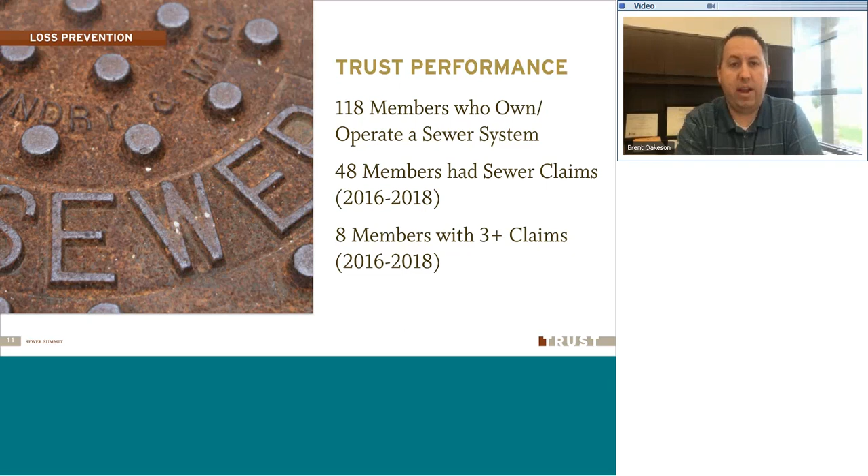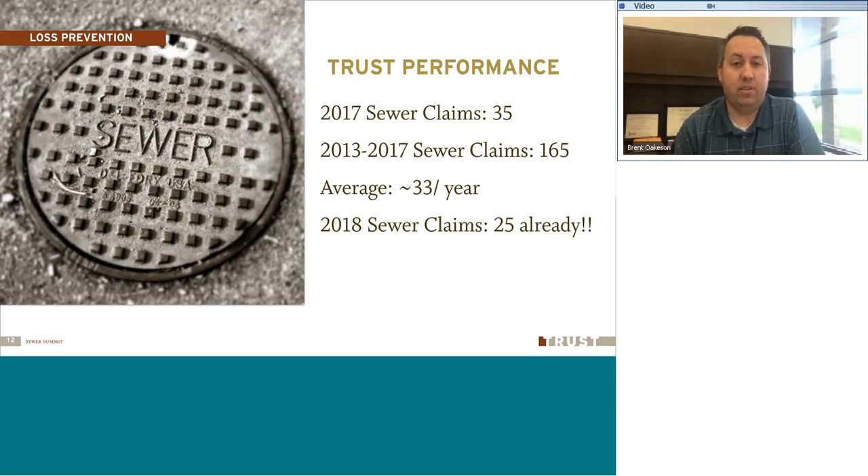However, this year we're a little ahead of schedule—about 25 claims have already come in through this part of the year. Granted, we're into August and there are still months left, so there will likely be more. But hopefully we can lessen that. Having 25 by mid to late summer is a bit ahead, a little higher count of sewer claims so far this year. Just an update for you on that.

One example: a lift station failure caused 2 houses to back up, causing approximately $70,000 damage in one home and $40,000 in another. Then we had another claim where the homeowner wasn't home at the time—the main line backed up into a home with nobody there, causing about $40,000 of damage. So there have been some really costly claims this year.

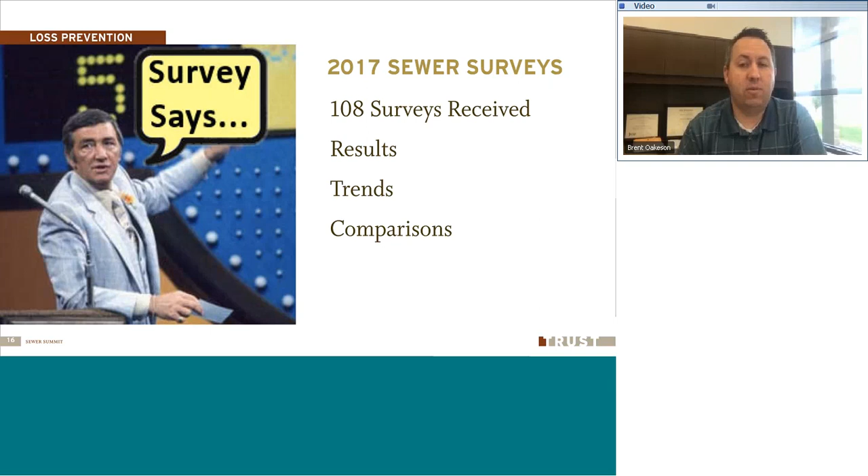I'd like to share those results with you and show you what's happened throughout the last year. We can also use this for comparisons to help you see how you stand against the average of the trust, how your system is being managed, and the frequency of the things you're doing. So I'm going to show you those real quick. This is one of the surveys we sent out in previous years.

We'll be sending this out again later this year toward the end of the year, and we'd like to get all those surveys back by the end of December, the end of the year would be best. Then we can use that information to gather this data, do comparisons with claims, and share that information with you again each year. We find this to be very valuable to give a good overview of what's going on in the state with the membership we have here at the Trust.

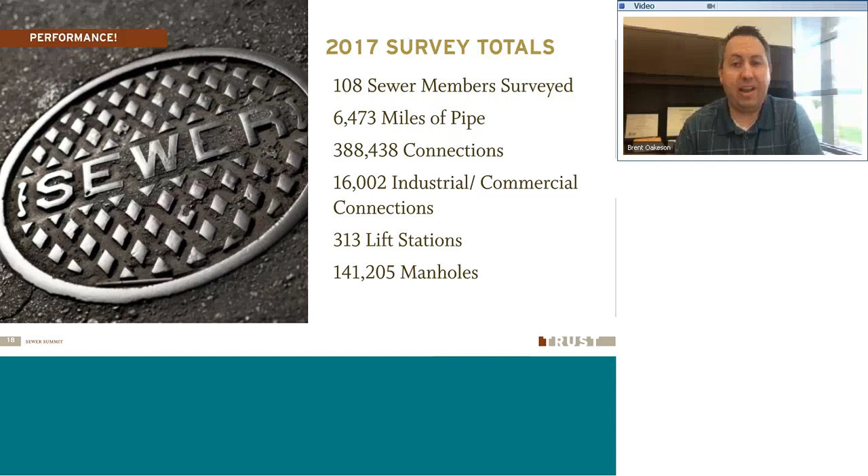So be watching for that sewer survey, I'll send that out to you later this year. But looking back over 2017, of all the 108 surveys we received, you can see our amount of miles of pipe: 6,473 miles of pipe in the state from these surveyed members here at the Trust. Over 388,000 connections, over 16,000 industrial or commercial connections, 313 lift stations, and over 141,000 manholes. Obviously that's a lot of exposure, things that can go wrong and cause claims and damage. So we want to look at each one and see what we found. From those surveys, about 70% of the manholes had been inspected.

About 99,000 manholes were inspected last year, according to the survey. Of the 108 members that turned in that survey, 50 had done 100% manhole inspection on their system, meaning they had gone through every manhole, at least popped a lid and taken a look to check the condition and make sure things are flowing okay. That's a really good best practice. It's probably the number one key thing we focus on with our Trust Accountability Program, getting in there and seeing with your own eyes what's going on in each manhole. It really makes a difference to prevent backups and problems in your systems.

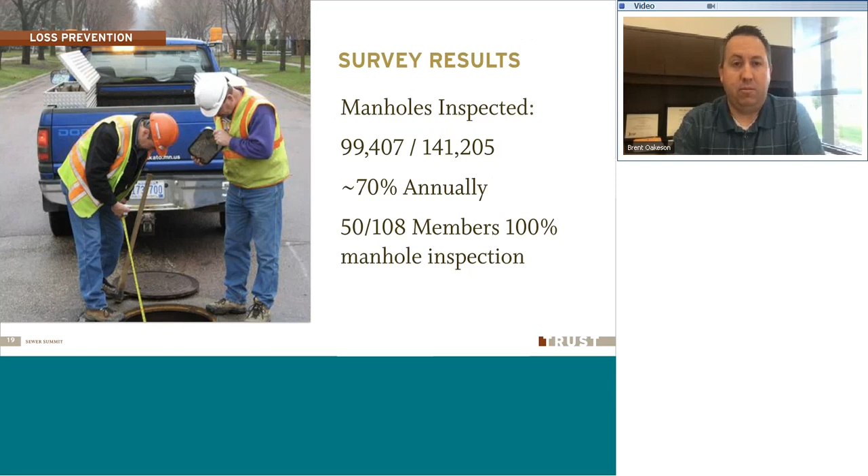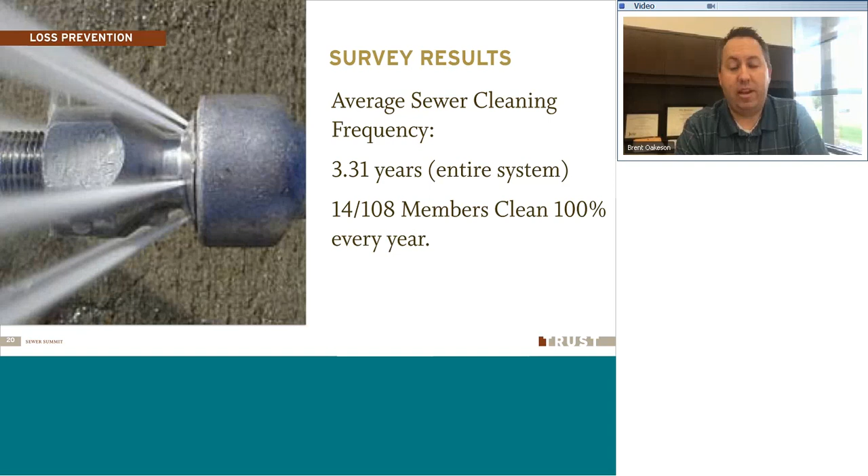So some really good numbers there. We also look at the average sewer cleaning frequency. We like to know how often your entire system is getting cleaned, the type of rotation you have. On average, the Trust as a whole came in at 3.31 years as the average time to do the entire system. We had 14 members that actually do 100% of their system every year, and they're likely not having backups because of that increased frequency of inspection and cleaning. So good information there too.

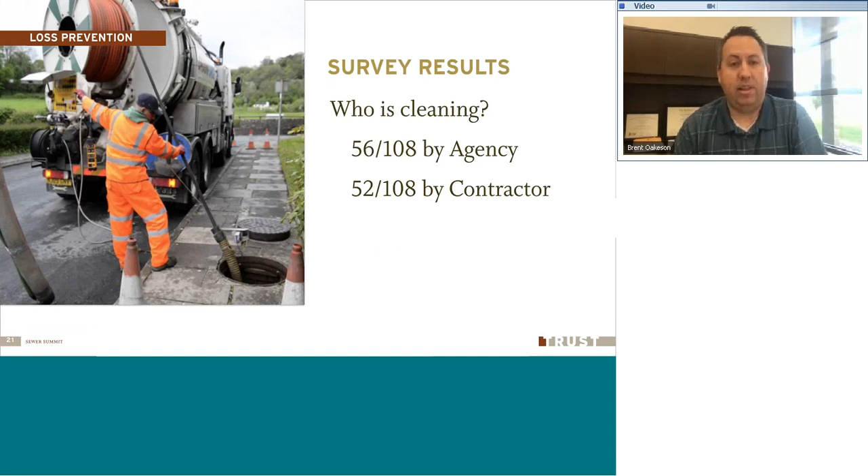Who is doing the cleanings? We had about 50-50 on this, same as last year. Usually about 50% is the agency itself doing the cleanings - they have the equipment to do that. The other 50% or so have contractors come in and do it for them. Just an idea for you there.

Looking at backups, agencies that have equipment to respond to backups are likely to have a quicker response time. They're likely to be able to take care of it themselves. About 78% of the Trust membership, according to this survey, has their own equipment to respond to backups, which is great - about 85 out of 108.

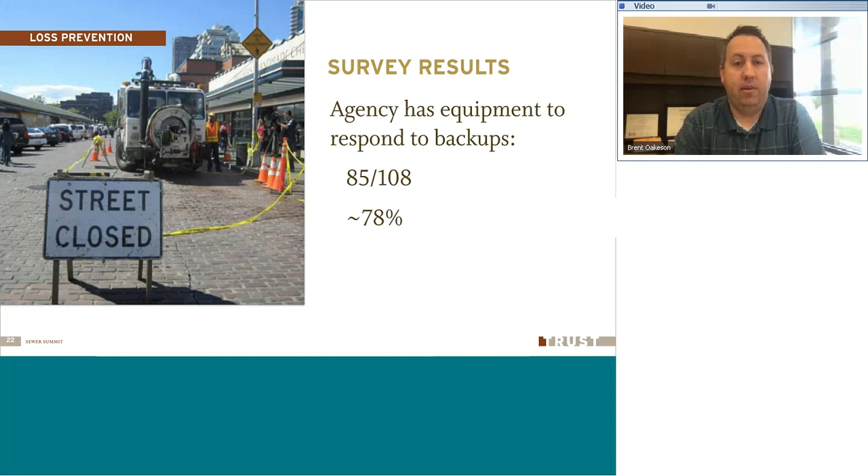As far as the sanitary sewer management program, the agencies that have adopted these - 87 of 108 have actually adopted one. They've turned in their NOIs, their notice of intent, and permitting and all of that is being done. So we're at about 80% reported from our survey with the Trust. Last year was at 71%, so we've had an increase. The more entities that do this, the more likely they are to have a better, more comprehensive program that prevents the backups.

Back in 2014, it was only 34%. So you can see those numbers have gone up a lot, especially in the last couple of years, and that's a really good positive thing to have for managing your system.

So we send out report cards. We've done this in previous years. We use the information you send in from the surveys each year to compile the totals, look at the numbers, and then send you a report that shows how you stack up against the averages at the Trust. Here's an example of one we've sent out in previous years, and we'll continue to do this. I'll be sending these out to those of you on the webinar watching this. We'll send you a copy of your report card showing the specific data you put in your survey - miles of pipe, connections, cleaning frequency and things like that - so you can see how you stack up against the averages. That's a good indicator for you to see how your management is going, and maybe there are some areas that stand out that you can improve on or do a little more with next year.

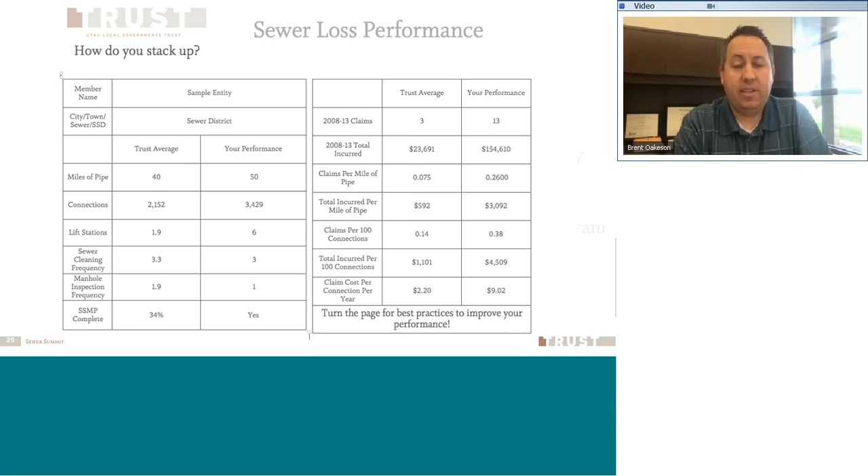So now I'd like to turn some time over to Jennifer Robinson, with the Utah Division of Water Quality. She's going to talk to us today about the Utah Sewer Management Program. She's been a great help for us in the past, and she has some great information about new updates going on. So with that, I'll turn it over to you, Jennifer. Thank you.

So I will be speaking on the Utah Sewer Management Program. This is the program that was put in place a few years ago by the Division of Water Quality.

So I'm just, ooh, this isn't working. Why is this not working? Oh, there we go. All right.

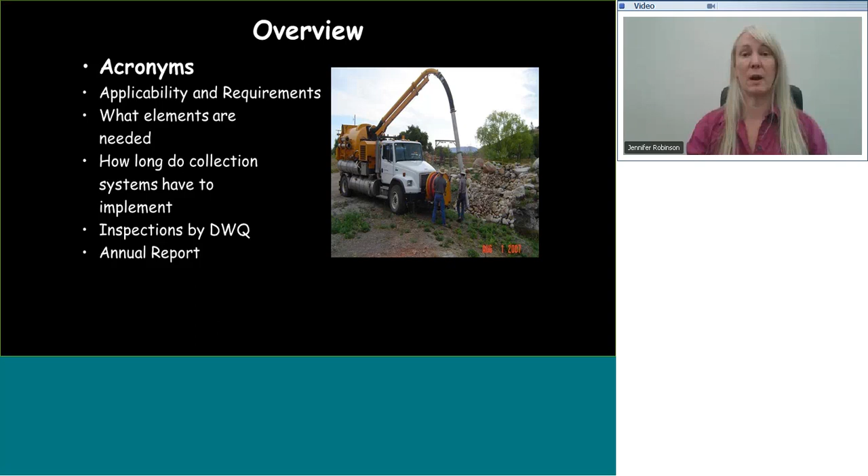Just an overview of my presentation, we're going to go over these elements of the program. This is a shortened version. I will be giving a presentation at Rural Water as well as at their Northern Conference in Layton that will be a little bit longer, with similar information but more detail, as well as for operators down in the Richfield area. I will also be giving one for Rural Water.

The SECAP, that's the System Evaluation and Capacity Assurance Plan. That is the plan that if you have, I believe it's over 2,000 connections, you need to implement. If you're less than that, it's an option for you.

The Sewer Overflow Response Plan is something that everyone has to implement, as well as the SSMP, which is the Sewer System Management Plan. So just some acronyms so that you're aware as I go through this, of what I'm speaking about.

POTW is the Publicly Owned Treatment Works. That basically extends from the wastewater treatment plant into the collection system, so it covers everything. So we'll go over applicability.

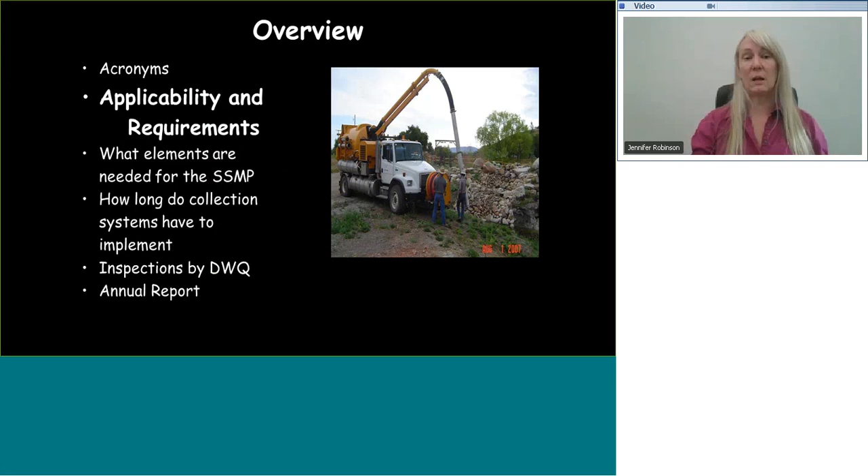The applicability of this rule is basically everyone that owns and operates a sewer system in the state of Utah that is public, federal, state, or municipality is covered by this. The only thing that would not be covered under this is like a residential community that may have ownership of their collection system.

We do have a couple of those that are homeowners associations that are not covered under this at this point. In the future, we have the flexibility if it's needed to cover them.

So just some general information. It is a general permit requirement, and everybody is covered by this. A lot of times with satellite systems, you have coverage over your larger wastewater treatment plant that holds the UPDES permit, the Utah Pollutant Discharge Elimination System permit. With this one, everyone that has a sewer collection system is required to get this permit.

In order to do that, you need to complete a notice of intent for coverage. If your community has not done that yet, go ahead and get that in as quickly as possible. That link below will get you to the information regarding the notice of intent.

The notice of intent has changed slightly. It's a little bit less information than the original notice of intent that was submitted about 6 years ago, so hopefully it's simplified to the point that you can gather that information pretty easily. If you do have questions, my contact information is at the end, and you can give me a call or Jeff Studenka as well.

Next we'll go over the elements of the SSMP, the sewer system management plan you need to develop for your collection system. These are just the general elements of that plan, and I'll go into more detail regarding those elements.

First, we want an organization information chart, or however you want to put this together. This is basically who's involved in your sewer system. It can go from detail to simplicity, however you want to do it. If you just want your DRC and your operators on there, that's fine, but we do want to know who is involved in your sewer system, so there is some type of organization structure that others can be aware of.

Other things that need to be involved in the SSMP is your legal authority. We want to make sure you have the authority to prohibit things from occurring in your system, as well as making sure it's properly designed and limiting obstructions. If you have industrial users in your area, we want you to be able to inspect them as necessary, and have the ability to take actions to prohibit things from going into the system, including enforcement if necessary, to ensure your system is properly cared for by those using it.

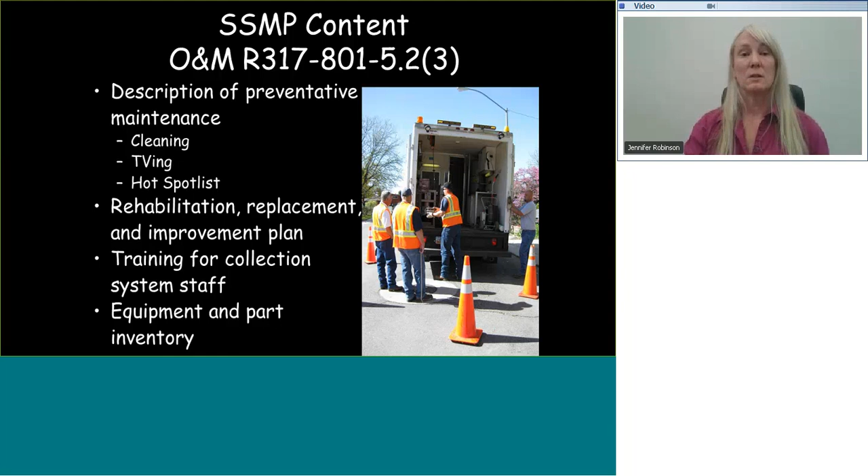The other thing is the U-Warn system, where you can call on other communities. That can also be part of your SSMP, where you have someone in the area who's willing to assist you, and that's part of being able to have that equipment and part inventory as needed. So this is really you figuring out how you want to implement these elements of your SSMP, making sure that you have adequate inspecting, cleaning staff, and also resources available to you.

The other thing is, a lot of times with these programs, if you don't document it, it didn't happen. So we want to make sure there is documentation. That's one reason we have the SSMP available to everybody on the website at utah.gov, and you can find that on the water quality page. There is a model program available to you there for the SSMP.

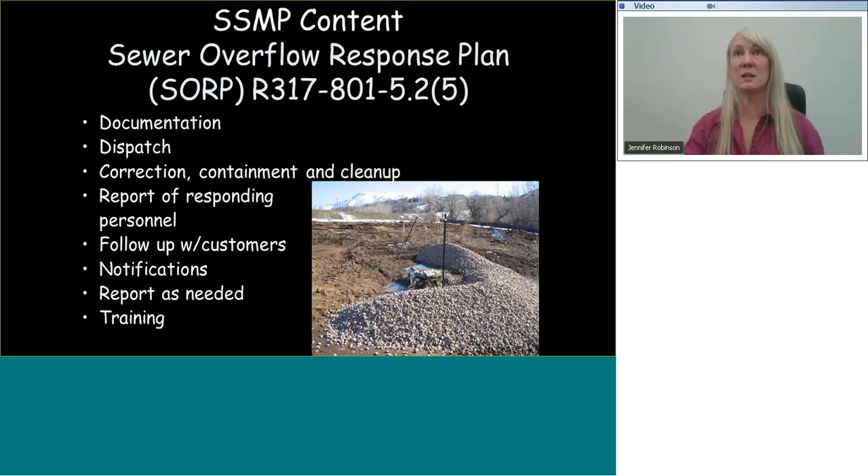The FOG control program, this is another element that if you have over 2,000 connections, you're required to have it in place. If it's under 2,000 connections, it's up to you to decide if it's needed. Now, if you do have issues with fats, oils, and greases, I would suggest you implement it, and if it becomes an issue, the Division of Water Quality may require you to implement this program. But this is really making sure that any industrial user in your service area is not causing problems in your system or causing blockages. And if there is an issue, you have that on your hotspot list and you're maintaining it until maybe a grease trap or interceptor is put in place by that industrial user.

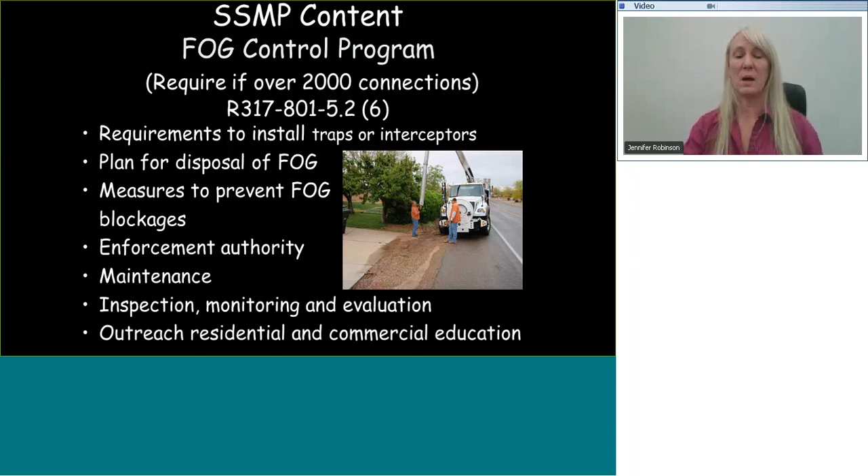As well as doing outreach to your residential community, letting them be aware of potential things that should not be going into your sewer. We've got a flyer that can be given out where you put your information on it, but it goes into the do's and don'ts of what to put in the sewer for a homeowner, and that can easily be put into a tri-fold and mailed out to your community.

So the system evaluation and capacity, the SECAP portion of this, again, it's for those facilities that are larger, over 2,000 connections.

This is just making sure that you have the capacity available in your community to handle the flow, and then also looking at trends of any increases, and how new subdivisions or new industrial users may impact your sewer system. This could also apply if you have a master plan for your sewer system—you don't need to revamp something, you can use existing resources you already have in place, just making sure that if you do have a master plan, it meets that requirement.

Monitoring, measurements and modifications. Anytime you make a change to your sewer system management plan or your SECAP, that needs to be submitted to the Division of Water Quality. You need to identify and illustrate SSO trends, as well as do internal audits of this program. This isn't something you develop and put on the shelf—we want to make sure you're auditing it, making sure it's working, and updating it as necessary. This can be developed by staff at communities; it does not need to be developed by an engineering firm. There are documents online that are available—you just have to update them with the information you want to follow.

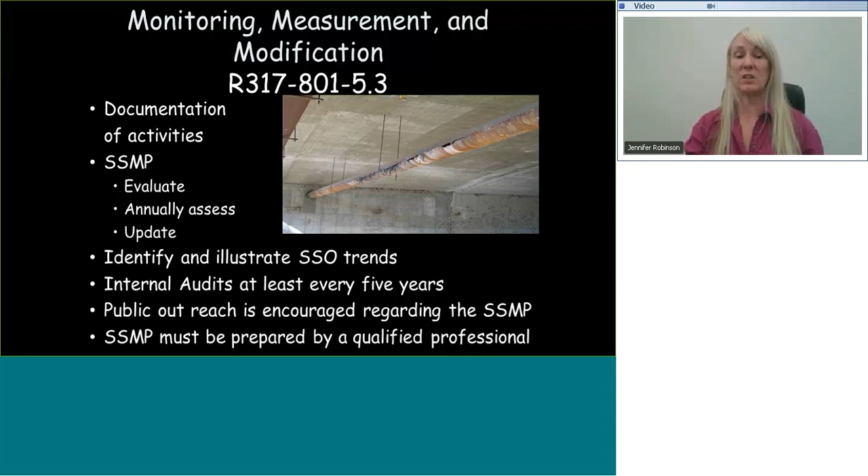Now we'll look at a couple other things. How long do you have to implement this? The rule has been in place since 2012, and you can see those dates on your screen—essentially all of those dates have passed. So everything regarding the SSMP and SECAP should have already been submitted. Hopefully those have been done.

We did decide, with the renewal of the permit, to give some people who may not have been aware of this program, or where there was staff turnover and communication wasn't there, an extension of those requirements. So anyone who has not gotten that information to us has until November 30th, 2019, to submit the SSMP and SECAP information to the Division of Water Quality.

As far as submitting those reports, we do not want your sewer system management plan or SECAP submitted to us directly. Sometimes if you have a master plan, that's already being submitted to our engineering folks at the Division of Water Quality, but what we want is basically the approval by your governing body—this should be taken before your city council or district board, with them approving implementation of the program.

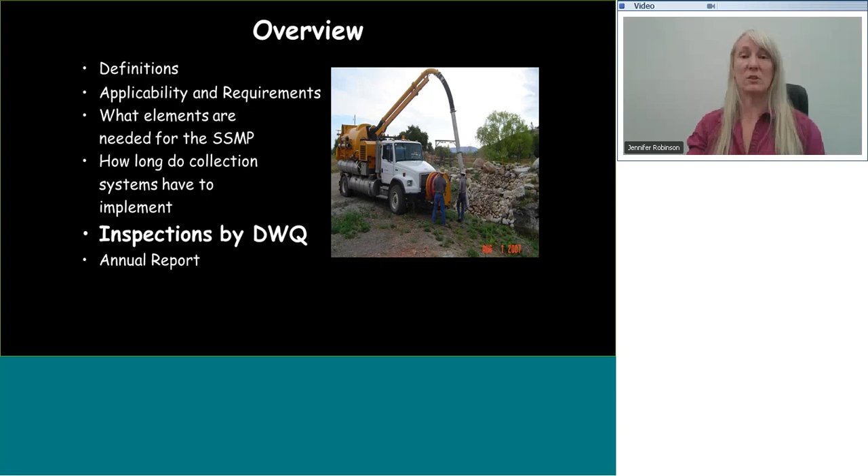Annual reports. The annual report is the Municipal Wastewater Planning Program, sent out yearly by the engineering section at the Division of Water Quality. It has several different sections, one of which is the collection system section, required to be completed every year and submitted by April 15th. This year, for the first time, we required it to be submitted electronically, and hopefully that worked out well for everybody. I believe next year we'll be doing the same.

As far as contact information, if you have any questions regarding your SSMP, or submitting documentation regarding the SSMP, SECAP, or even the Municipal Wastewater Planning Program annual report, there's my contact information, as well as Jeff Stadenka, who's involved in this program with the Division of Water Quality as well. And if you have an after-hours event that you need to get a hold of us regarding, the DEQ emergency number is there, and that's being manned 24 hours a day. So if you do have something after hours, you can get a hold of us that way. Thank you.

And again, you can always reach out to her with questions if you need help getting that in place, as she mentioned. So I want to take a quick look at some of the backup things that we see, kind of some trends, and then an overview of things we can do to help prevent the problems in the system, such as backups and overflows and things like that.

But here's some things that we've seen in the past. Foreign objects that get into the system - this has happened before. I've heard of cases where you'll have a contractor on site doing some work, maybe in a home building area. They knock the lid off and gravel falls into the system. You can get some foreign things falling in. There's even been debris get in there. Even a 2x4 has been found in a system before, down in the pipes and in the connections there. Things from the homeowners get in there too - grease, things that get trapped in there. You get a buildup of grease and roots and things that get blocking the system. Those are some of the main causes of backups.

Lift station failure, I mentioned one of those earlier. We had this year, there was a failure on one of the systems and it backed up into 2 different houses, causing some severe damage in those houses, costly claims on those. So there's lots of things that can get in there.

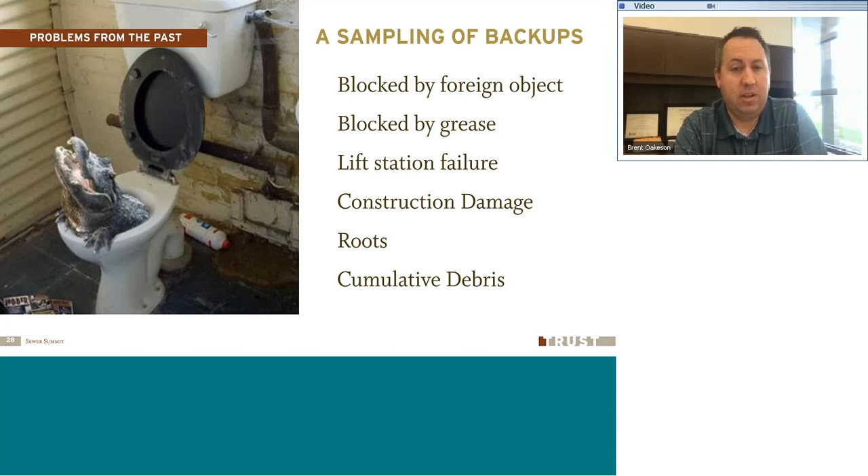There's been some cases where the connections come loose. They weren't installed properly - maybe there's laterals that weren't connected properly to the main line, or over time things shift or break or come apart.

That often leads to problems as well. Lack of inspections is another root cause.

There was one earlier this year where we had a backup into a home, a claim on it, where there was a lot of damage. Talking to the member of the trustee entity, they went back looking at the mapping, looking at when was the last time this place was inspected, and they found that it had been missed. It was a section in their system that for some reason had been overlooked or hadn't been looked at for a little while, and possibly that's the reason that caused the backup. They weren't able to check it and find obstructions or things in time before it ended up causing the claim and the backup. So inspections are critical, looking in your system and knowing those things.

Roots and grease, we talked about that, and we'll talk more on that as well. And actions by the public—as mentioned, homeowners can put things down. They may not realize there are things that can cause real problems in the system, whether it's kids' toys, debris, or other things getting put down there. We often find that that's a root cause as well, so there are things we can do to manage and look at that.

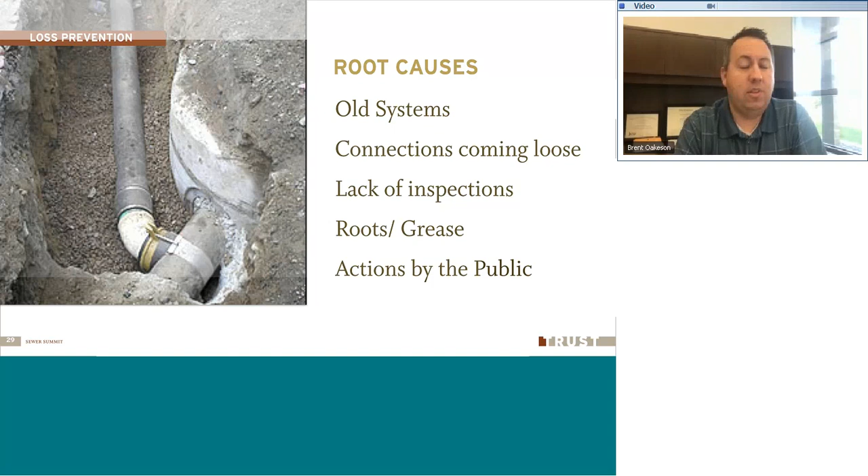So that's one thing you want to do in managing your sewer system: make sure you're finding those real roots. Find the root cause of what's causing it. Ask yourself why—why are we having backups, why are these things happening? There might be some hot spots where you need regular maintenance to make sure problems aren't happening in these locations.

So make a plan. Have corrective actions—maybe hitting those hot spots frequently throughout the year, checking on those more often. Maybe there are things that have happened in the past in your system that you want to go back and readdress on a regular basis. But have a plan and look at that so you can prevent those problems and have a better running system.

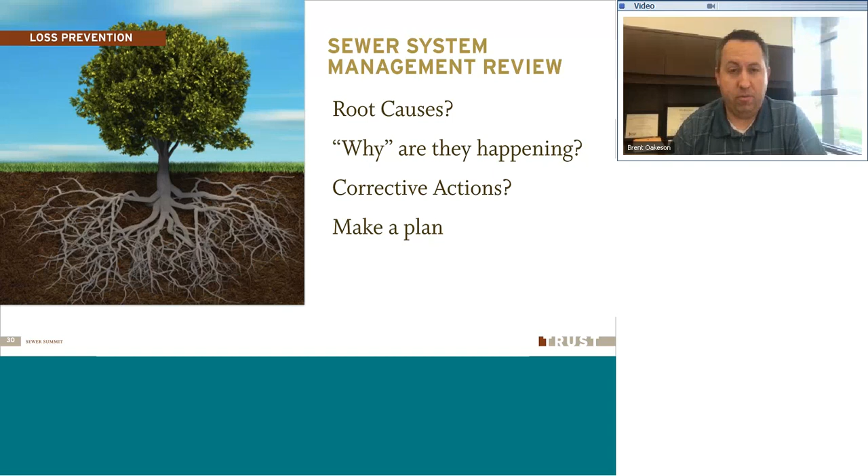So some of the other things you want to look at, and we look at this in our sewer survey because we see these as critical: are your manholes being inspected annually? This is the number one thing we see that could be the greatest contributor to having a successful system without backups and claims and problems. See the frequency of your inspections, and see if there's any room for improvement there that you can increase those inspections a little more and make sure you're getting them all in each year.

As well as your sewer cleaning frequency—that should be on a regular basis, and it may vary a little from entity to entity, but have a good frequency that meets the needs of your system, so you can get in there and have a comprehensive look at it, getting it inspected and cleaned. We find that to be a really good thing.

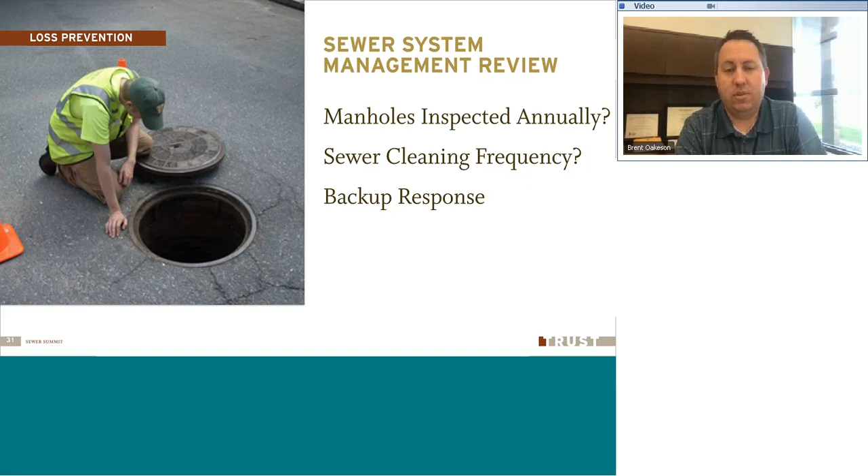Take a look at your backup response. See how long it takes to get to a backup, what equipment you have available, and how your plan is. Maybe there are improvements you can make to increase that response time, have a quicker response, and get on things before they become a worse situation.

So these are other things you want to look at with your sewer system. Jennifer talked about the SSMP—make sure that's complete and in, that will be a real key to helping you there. Make sure your operators are trained; get them the training, certification, and things they need so they can effectively and efficiently manage that system.

Look at your capacities, make sure your inspections are up to date, and—Jennifer mentioned this one as well—a map of your system, make sure it's up to date. That can really help you know where things are and what's going on in your system. For example, you could have lines you don't get to check as often, or manholes that are covered up.

Maybe they're out in the field and you don't know the exact location of them, or there's things that are getting missed for some reason, or you're not able to have a look at throughout each year. But having a map of the system that's up to date, that shows where all those lines and manholes are, all the access points and things like that.

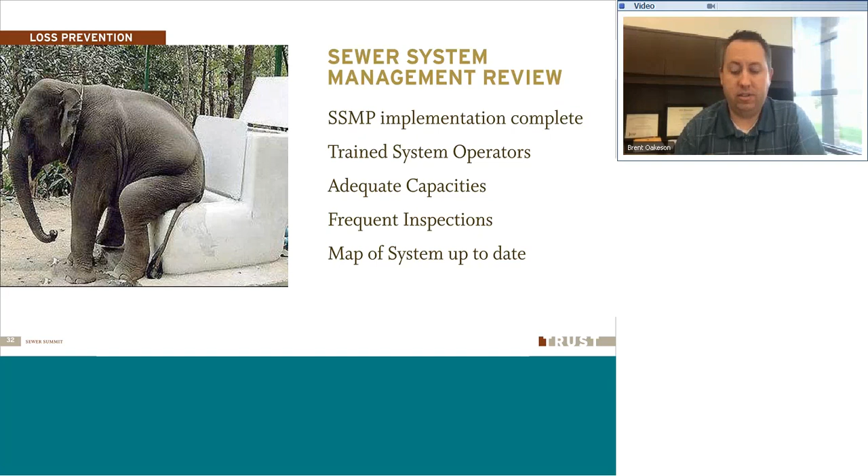Have that up to date, as it can really help you to prevent things and have a good look at your system as you're working there. Have some action plans. We talked about this as well with your root causes. But address those problem areas. Maybe there's things you need to look at specifically in certain hotspot areas or other parts of your system that you want to look at.

And then purchase new equipment. There might be some new equipment that you need to better manage your system, whether it's for backup or for maintenance or cleanings or new tools and equipment. Have the good latest technology of things. Get the things that you can to make it more effective for you to manage and maintain your system. Those are all good things to have and good reminders to look at for your overall management of your system.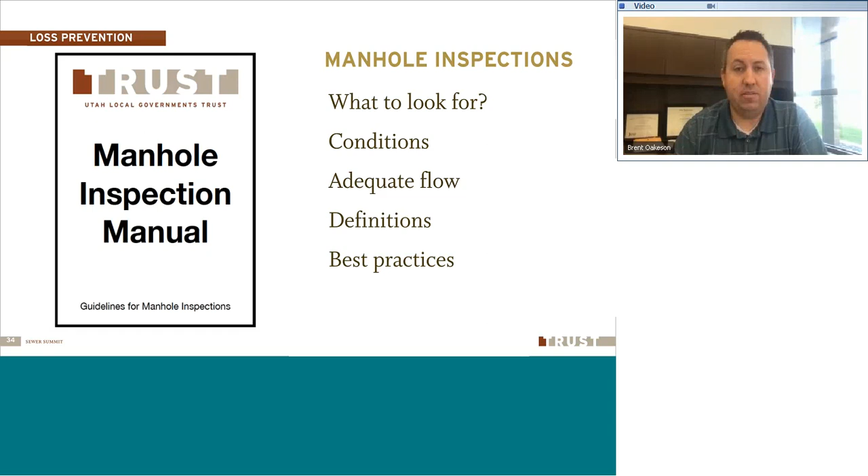So here's just an example of some of those things that we put in there. Collar conditions, cone conditions, trough conditions, infiltration, what's good, what's acceptable, what's kind of a satisfactory rating, or what's kind of a high priority. We got to get on this right now and get this fixed before something backs up or breaks. Just kind of a simple guide on that, but we will send that out to show you that information that you can have and share and even learn from.

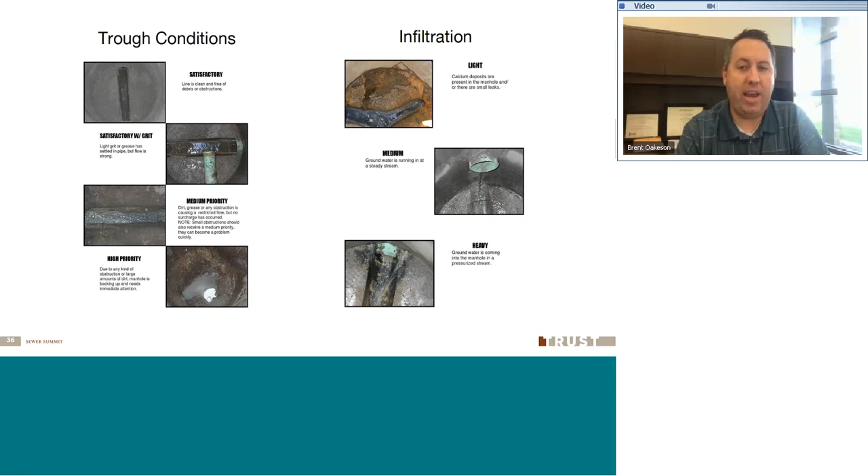You can share it with your new operators or new people working there with you, so that they can see what to look for. They kind of understand what's good and bad, and kind of put a rating on some of those things. Also in this manual, we have an example of an inspection sheet. Documentation is everything, and documenting those inspections can really help you too, so that you can see how your system is, how it's going over time, year after year. Are there things that are deteriorating? Are there any components that need to be replaced out or changed or improved on?

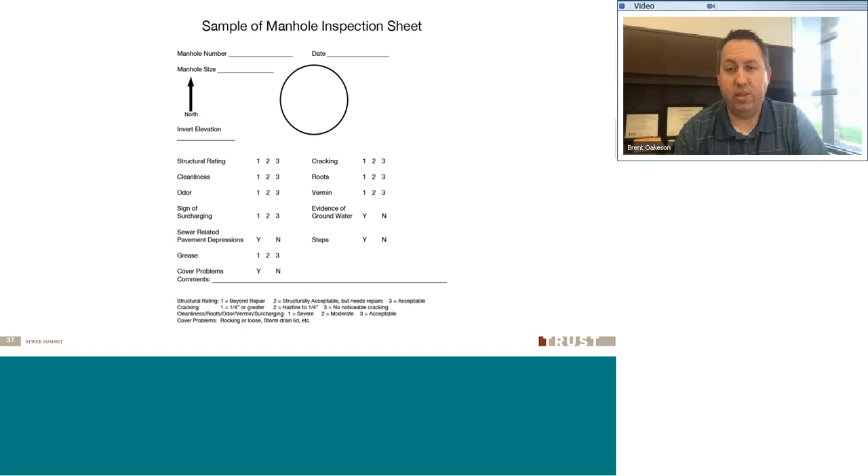But the documentation here can help you. And this is just an example of one. You could use many other templates or things that you have, but we share that with you as well, so you can see what to look for. And as you pop that manhole lid, you know kind of the objects to look for instead of just looking at the flow alone. It gives you a little bit more detail to that. We find that those that TV and video lines are able to have a more effective view of their sewer system.

We recommend this be something you do in addition to your inspections and cleanings. Even though it may take a longer time to run the TV and televise the lines, it can show you things you may not know otherwise, such as roots or debris, things that build up in there. There could be cracks in the line, there could be sagging going on, and sometimes you don't know unless you really get in there and see what's going on between the two manholes. Just popping the manhole is a good indication, but oftentimes there's many things in between as well.

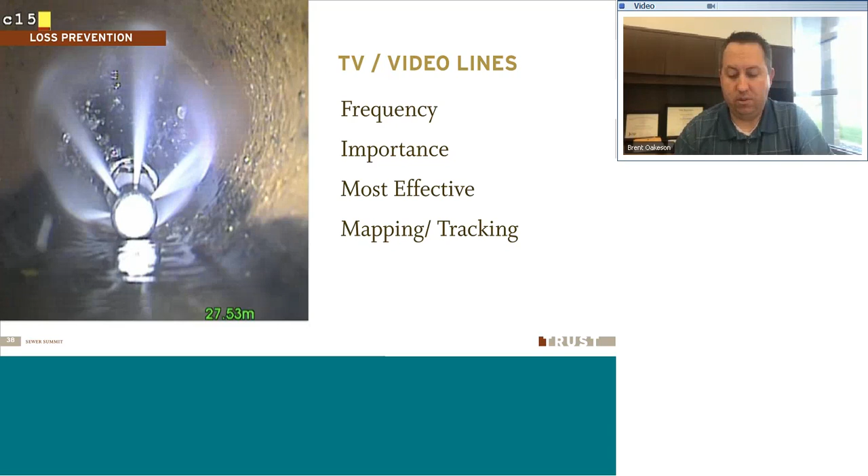So we recommend including this. Look at the frequency that meets the needs for your organization, that's best for your system. It really is a good, effective way to do that. Along with your cleanings, keep a good mapping and tracking on this as well. Know which areas have been televised, which ones you've looked at, and which might need to be done in the next year or so. Those are another good recommendation, best practice, to prevent backups.

Pre-treatment, look at this as well. Here's an example of some grease buildup, things that can get built up in there that you may not know otherwise. Look at those areas of your system where you have industrial users who might be putting down heavy amounts of grease, such as restaurants and other places. Look for those hot spots that you want to inspect regularly, and we recommend that you adopt a program of some kind for pre-treatment.

This is a very effective way to eliminate backups. It keeps your lines cleaner, lets them flow a lot easier. Whether it's having required grease traps or requiring other solid things be contained, have those things in place so it protects your infrastructure and protects you from having backups and overflows from those heavier used areas with things being put down in there. So definitely look at your pre-treatment options and consider adopting that program if you can.

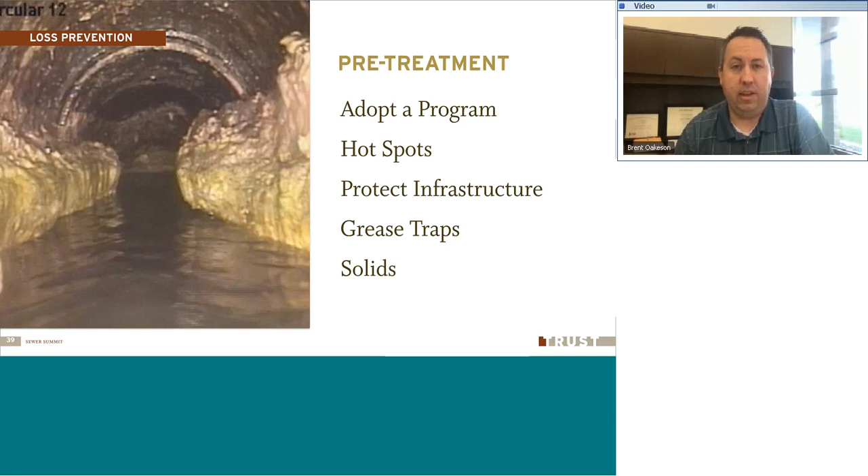Documentation is everything, as mentioned before. It's really important that you inspect things, that you document when and where these are being done, so that you know how to effectively manage your system. Definitely keep a good place where you have your documentation. Have good policies, have your SSMP documentation in place. If there's any repairs, cleanings, or other maintenance going on, take time to document that so you can have a good overview and know what area you've done, what's next, and what areas need improvement in your system.

Also, any actions that you take, if there's a backup, documentation can be a real help to you. Or if there's any complaints from owners or the public about things with your system, document those types of things, and it can really help you down the road to have that information. So watch for those things there.

We also want to look at what happens if there is a backup. How do you handle that? What actions do you take? The documentation can help show that your maintenance has been done, that you're taking care of the things you need to do. But the key is to have a plan.

You need to have some kind of plan in place that says, if we've got a backup and we're getting a phone call and something's going wrong in our system, what's the course of action we take? Who are the people on call? What's their contact information? What's the procedure for getting out there and responding on time? Having your plan, to what extent do you help people follow up? How do you assist those? Having a plan can really help you to train on that and have it in place before you have those backups and problems.

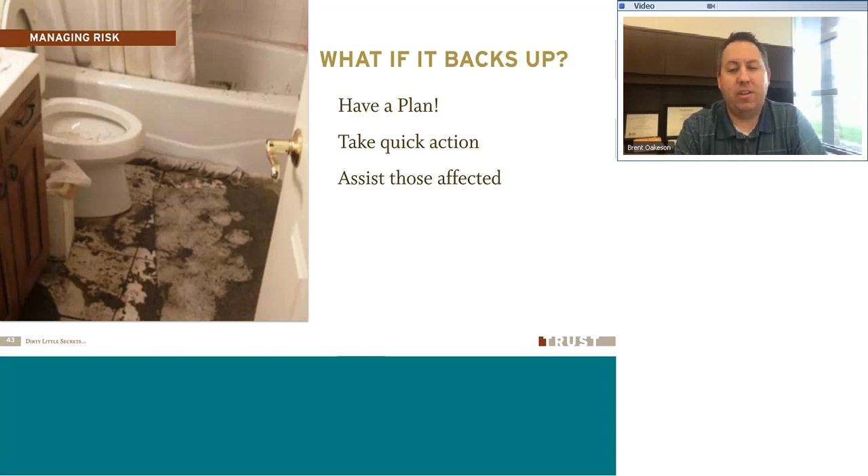So you might want to consider the limits of where you help people. But definitely you can be courteous and informative and help them with things.

Sometimes when people have a backup, they're going to be really upset. They're going to be probably a little emotional about it, and have some hard feelings over things. They may not see it as their fault. They may not understand that a lot of times it's in the lateral where the backup happens, and they simply might just need some guidance and information from you.

One of the things that we recommend, if you are responding and there's an upset homeowner, is don't admit fault. Don't ever say that it's the city's fault or the operator's fault. Don't admit that, because sometimes we simply don't know that until the investigation is done, until the follow-up on the claim is really done. It could be the homeowner's fault. It could be somebody else. It could be somebody up the hill in the system that caused the backup down lower. So you never know.

The thing that we recommend is don't admit fault, but you certainly can offer information. Provide them information on how the system works and the difference between the main line and the laterals. Talk about ownership of who owns what and who should be maintaining what part of that system. That's okay to give, but don't admit fault or promise to do anything other than to tell them you're doing your best to find out what happened, why the backup happened, and that you're going to do your best to stop it and correct the situation. That's really what you can do there.

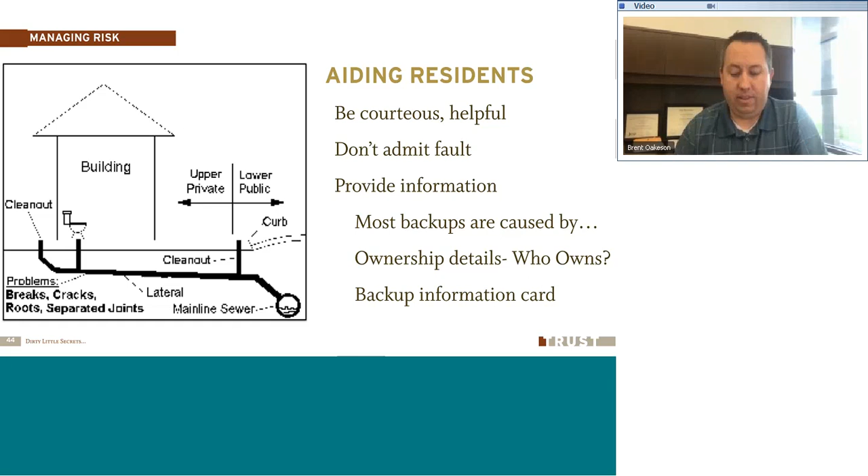But having that response plan can really help. Having the contact numbers, good response time, equipment at the ready, and giving that information to homeowners - that's really your best course of action for response there.

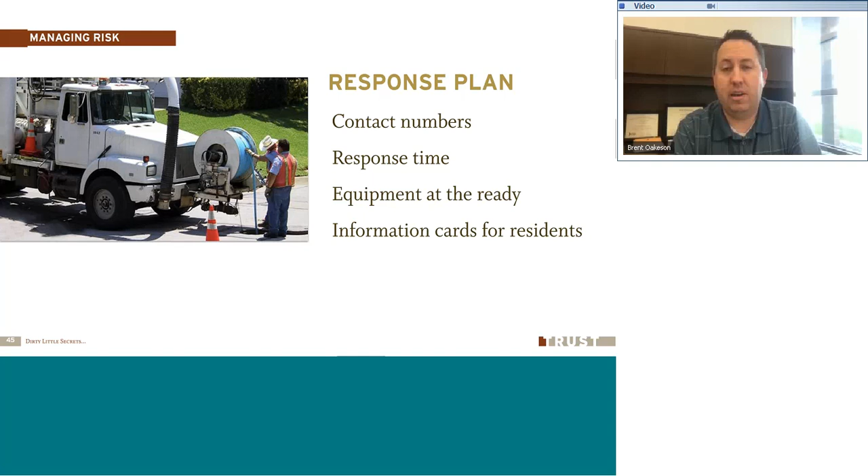If you do have a backup and there's problems going on, damage to the system of some kind or damage to property, definitely report that claim. You want to get that in as timely as you can. The sooner that you can get it in, the better they are to follow up and get better information about it. But do your part to gather information and data.

Maybe there's some basic things that you can share. You can talk about the maintenance details, when the last inspection was done near where the problem was. Have some detail on manhole inspections and cleanings and the frequency of how often you've been in that area. And photos - taking a picture of things that have gone wrong will really show you what happened there. Maybe there's a blockage. If you can take a photo or video of something as you're pulling out that blockage, it will show exactly what the problem was and what blocked that line, and can help to follow up and find out who's really at fault in the situation.

If it's a 2x4 down there, obviously that's not something the city's going to go putting in there. Or if it's a toy from a child, that's an indication that some homeowner has put something down there. So photos and details and gathering that data can be very helpful in preventing the claim, keeping the cost of that claim down if you have that information ready.

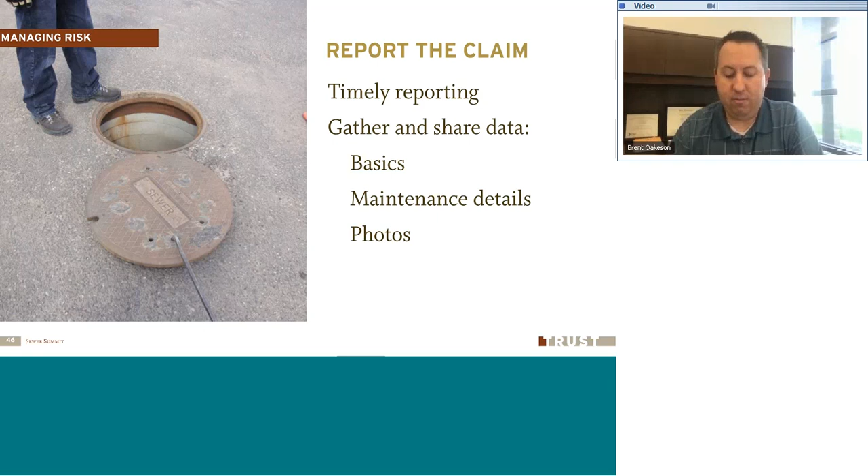So those are things to think about if there is a backup. But I just wanted to summarize now some of the best practices that we've seen. We share this year after year at our sewer summit, because it's very helpful. This is the stuff that really makes a difference in having a system that runs efficiently, that prevents backups, prevents losses, and prevents the overall cost of claims if there are any.

So these are the things that we've talked about today, as well as some of the things Jennifer's talked about. Together there's some really good information that we've provided here. But the key is know your system. You've got to know what's out there, and part of that is looking at your manholes, doing those inspections on a regular basis.

We recommend annually getting out to every manhole and popping that lid to take a look, see how things are flowing, see how it's going in there. Definitely keep your maps up to date, your system maps.

Have the information ready so you know where things are and can locate what you need. Make a plan. We talked about the SSMP. Looks like about 80% of our trust membership already has that. If you don't have one, make sure you get it in place and continually update it if updates need to be done or it needs to be reviewed, training operators, things like that.

Make sure that you have your SSMP ready to go. Have your backup response plan in place. Preferred providers, there's many out there. We don't necessarily have a list at this time, but definitely know who you would have for providers. You could look that up in advance.

Maintain your system as far as cleanings, do that on a regular basis. And TV on schedule, get out there, see what's in those lines so you can really see what's going on in your system. Sometimes you might clean it really fast and blow that line out, going really fast through, and you might miss something. But with a TV, televising that line, you can get down there and see what might have been missed or what else might be in there that could cause problems down the road.